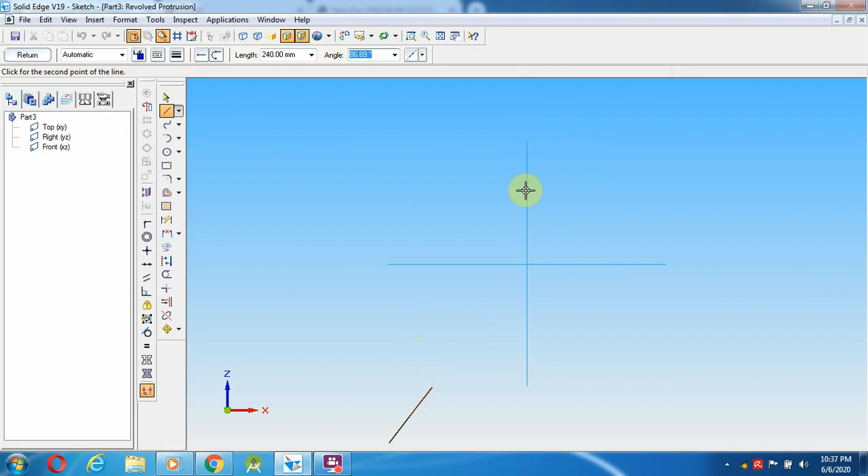Okay, go here, select a solid part, select revolved protrusion, select the front view, and select a line. So what is the height? 240 mm. I am going to draw a 240 mm line. 240, enter, and give fit.

Now after that, M12 mm dia. The hole is coming over here, a threaded hole. M means V shape threaded, having 12 mm diameter. So M12 means 6 mm, and up to this one will be 22 mm. So I am going to draw two lines: a 6 mm and a 5 mm line, because 12 means 6 at the top. So a 6 mm line.

M22 means 11 mm. We already drew up to 6 mm, so the remaining is 5 mm. After drawing the 5 mm, I am going to move downward. How much? 13 mm length. So I draw a 13 mm line downward, and then to the right side. How much does it have to go?

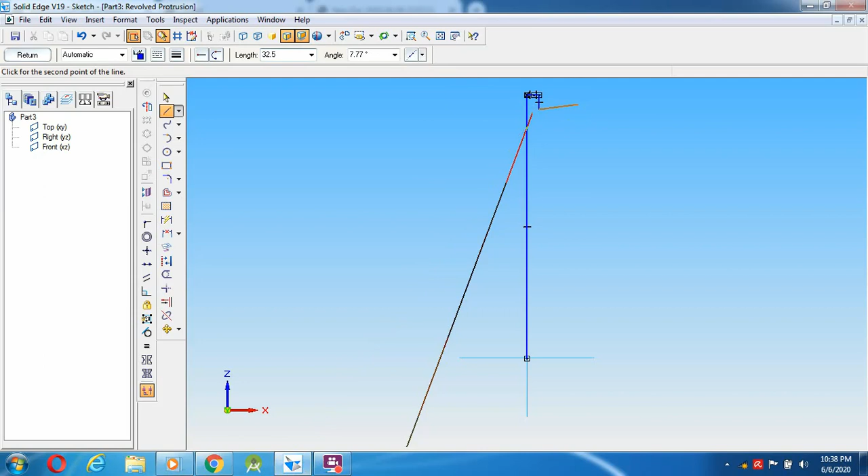The outer diameter is given as 65 mm. 65 mm means 32.5. We already drew up to 11 mm, so 32.5 minus 11 gives 21.5 mm. So I drew the 21.5 mm line.

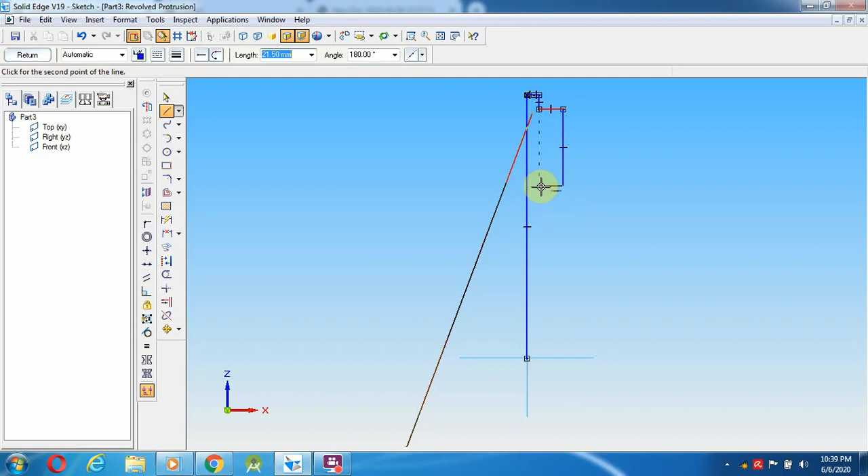Then I am going to make this length from here to this one. What is this length? They have not given it. From 83, up to here they have given a 13 mm distance. 83 minus 13 is 70 mm. So I draw a 70 mm line. Then I move toward the left side. What is this diameter? 19. This will be 32.5.

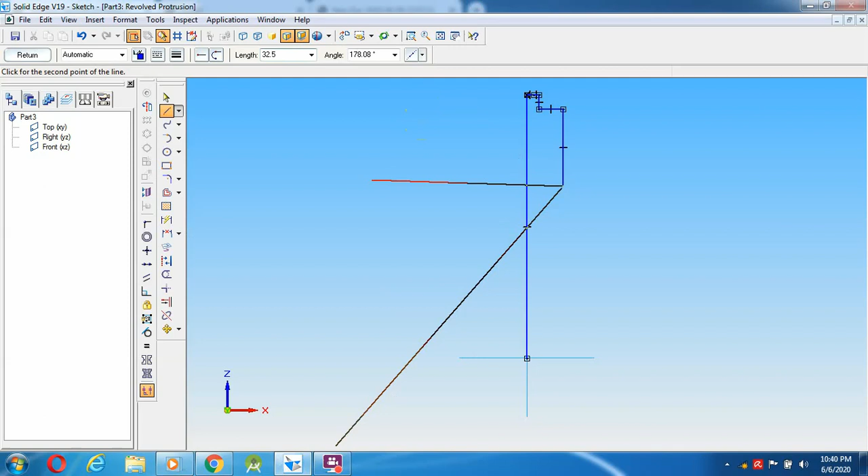So 32.5 minus 19 will be around 13.5 mm. 32.5 minus 19 mm, so 13.5 mm. Then left and right click. Then I am going to move this length down and join over here.

What is the length of this? That is 157 mm. We already calculated it: 240 minus 83 is 157 mm. So it has to be drawn up to 157 mm length.

Now I am going to draw this hole over here. What is its length? Up to 30 mm the threading is coming. The remaining 5 mm is a plain cylindrical hole. So that is 35 mm, and I am going to make the V shape here.

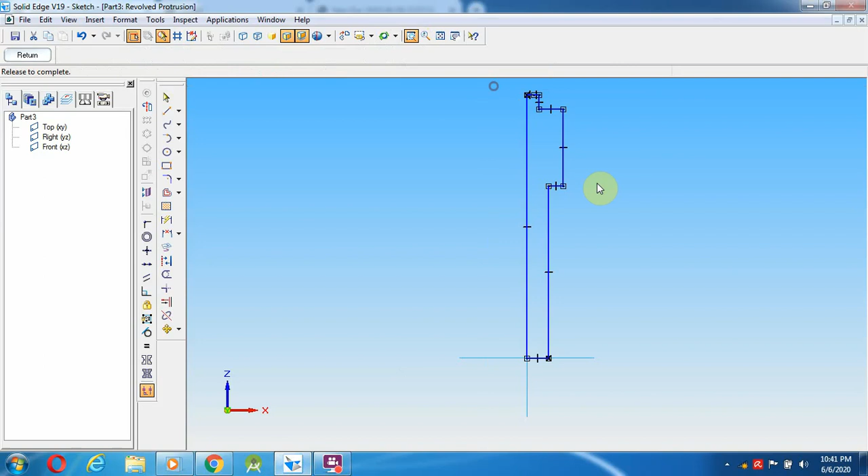Select the zoom option for this area. This is the line I drew for reference purposes; I am going to trim it. Select a line. From here downward I draw a 35 mm line, then toward this side. Toward the left it makes an angle of 180 plus 45, 225 degrees. So I provide a 225 degree angle.

Once it crosses, I stop. Then using the trim option, I trim this line and this line. After trimming, what other things do I want to do? This is the chamfer.

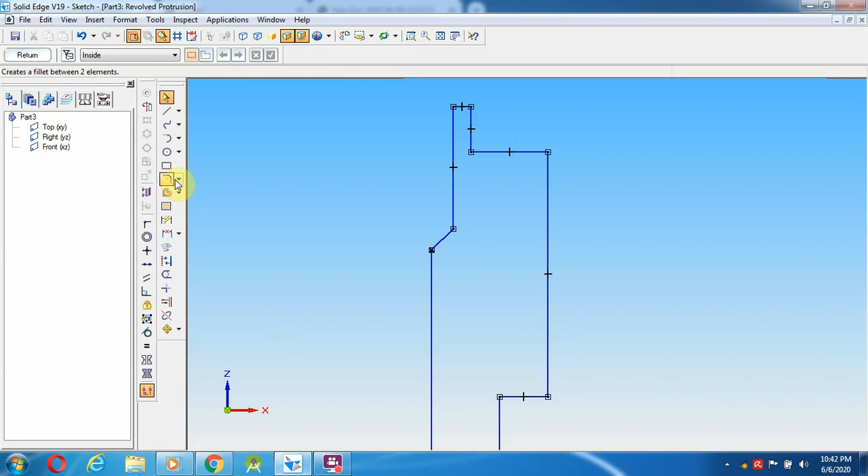Here I am going to make a chamfer. The chamfer value will be 10 into 45 degree. Select the fillet option nearby, the chamfer is there. Select the chamfer, then select the lines - this and this line. The angle we have to maintain is 45, and setback, that is 10 mm as given. Setback A is 10 mm, and this also 10 mm. So left and right click.

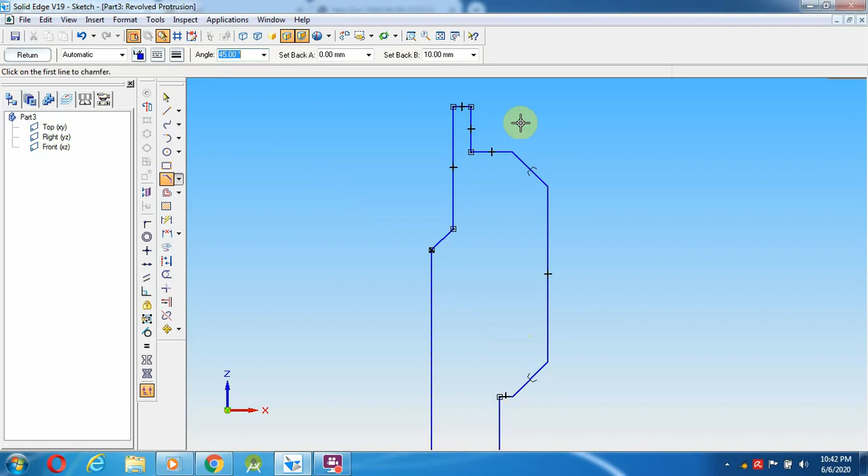Same like here, I am going to select left and right click and give fit. After giving the fit, go on and select the axis of revolution. Along with the line it has to rotate, so those lines I selected as axis of revolution. Give return, set angle and give fit - 360 degrees. If you have selected this, that screw spindle has to be created over here.

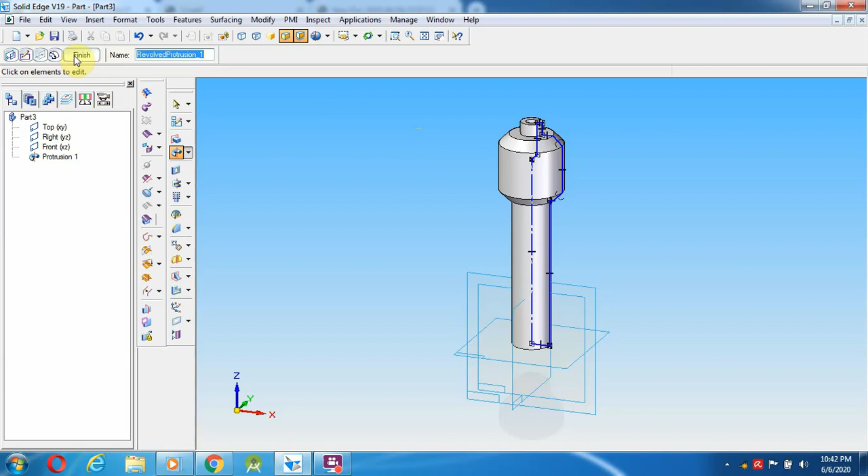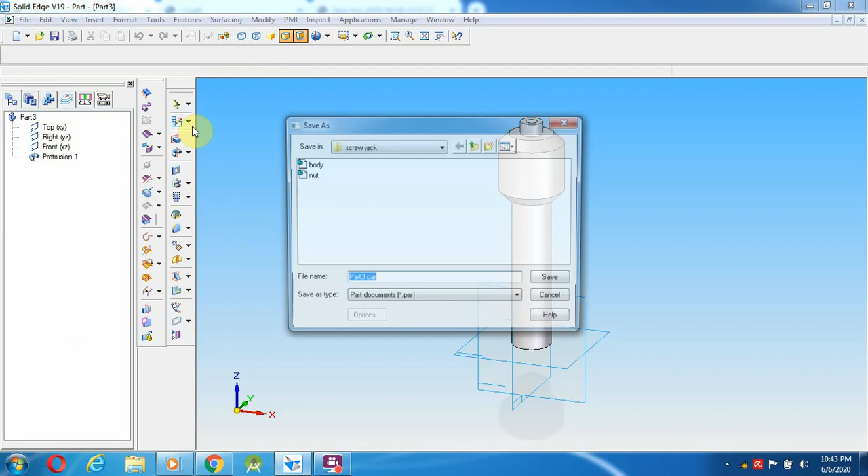What are all the other alterations we have to do in the screw spindle? In the middle I am going to make a hole. Before going to make a hole, I am going to save the drawing. So that is the screw spindle.

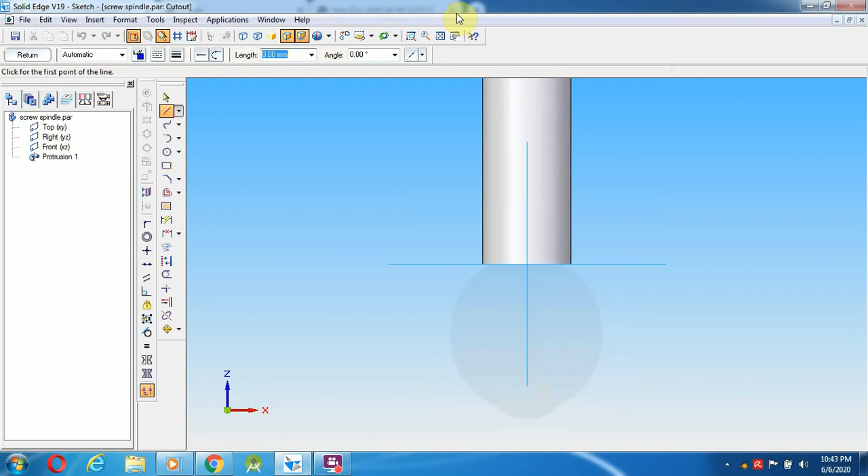After saving this, go here and select the cutout option. Now the cutout option - mid plane, either this or this one, because it is a circular one. Either plane you select, it will come over there. So this is the plane I am going to select. Give a fit. So from how much distance is the hole coming? From the bottom, as given, 35 mm height it is coming.

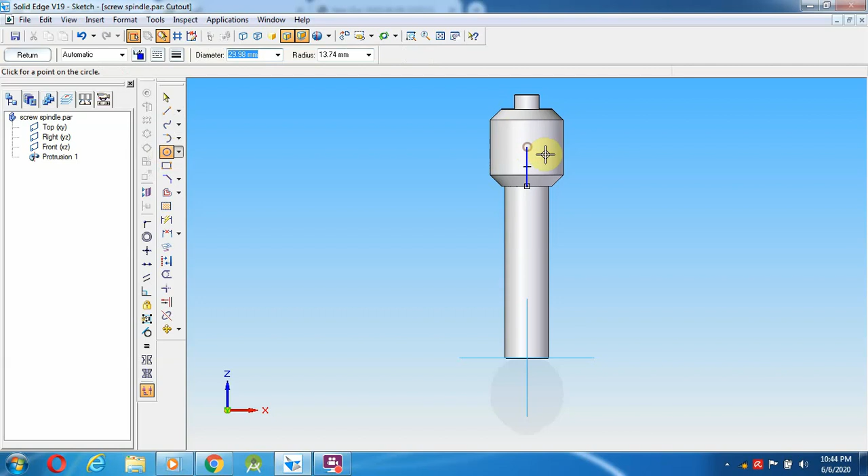So what is the diameter? 12 mm. So 12 mm diameter and 35 mm height. Select a line, from bottom here to 35 mm, and select a circle over here. What is the dia? Dia is 12 mm. After drawing the 12 mm dia, select a line and delete it.

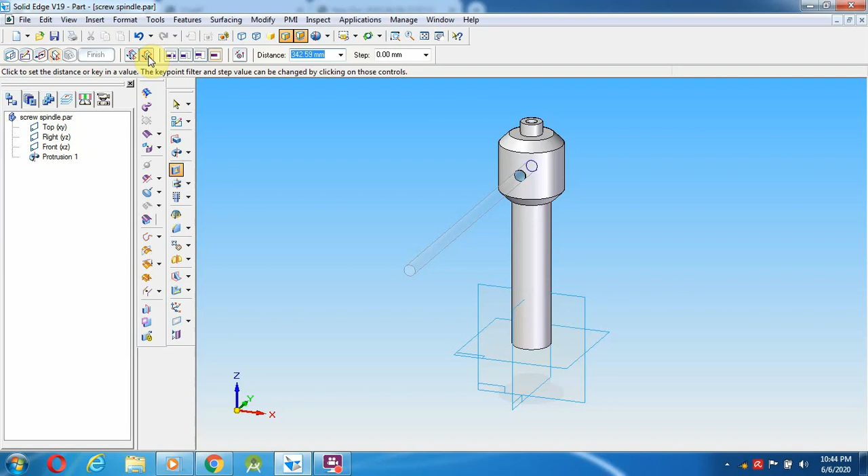Then give return. Use the cutout symmetric extent, because it will come from the plane on only one side, and I want to make the hole into both sides. So using the symmetric extent I am going to cut. It will be cut with left and right click. So this way we are going to make this cutout.

After doing this cutout, I am going to see if it comes out on the other side too. Yes, it comes. After that, going to make the threaded portion, it comes in the hole option. So the threaded is coming. Give straight one, yes, starting from here. What is the cylinder direction?

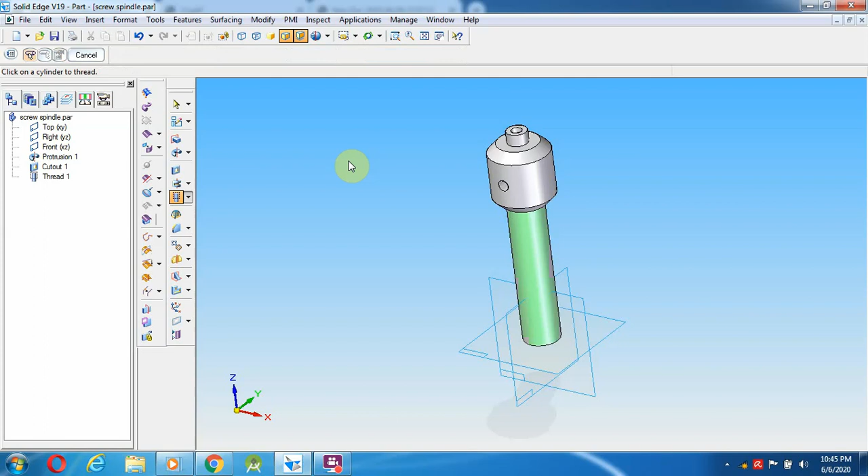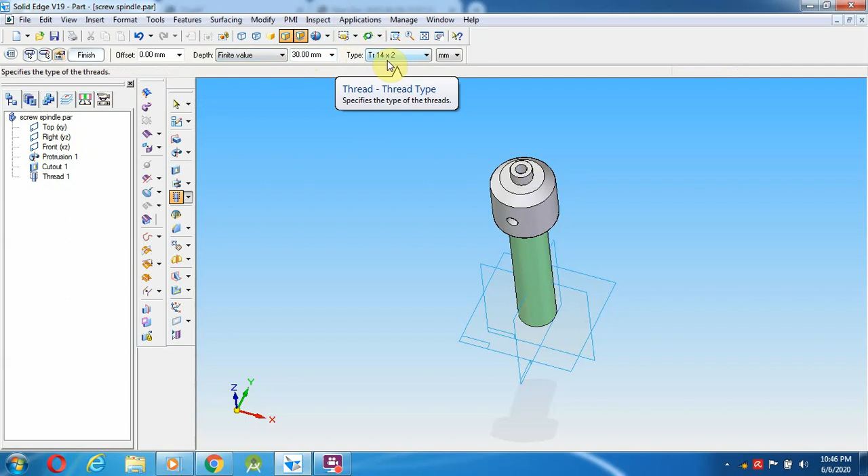It's not an issue, you can leave it. Then same like threaded, you can create the inner threaded portion. So in this particular cylindrical part, that threading is coming. Selected, starting from here. What is the distance here? It is finite value 30 mm, and here also it has to come as M12, but here it will be selected as 14. As it is, it's not an issue, you can select it, finish it up, cancel. Then you can give cancel. That's it, the screw spindle has been created over here.

Okay, then you can go to the next one. What is the next part? That is the fourth one, cup. So how to draw the cup? It is given as a fully sectional view. Only these portions have to be created over here. We will see in the video where the cup is.

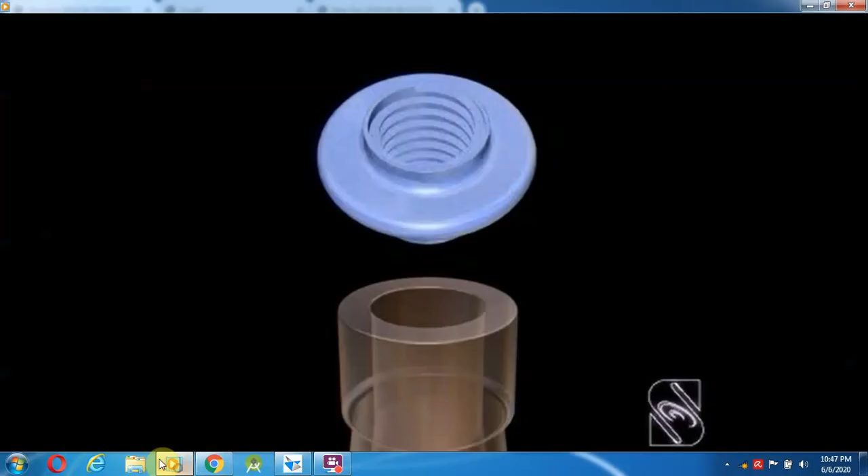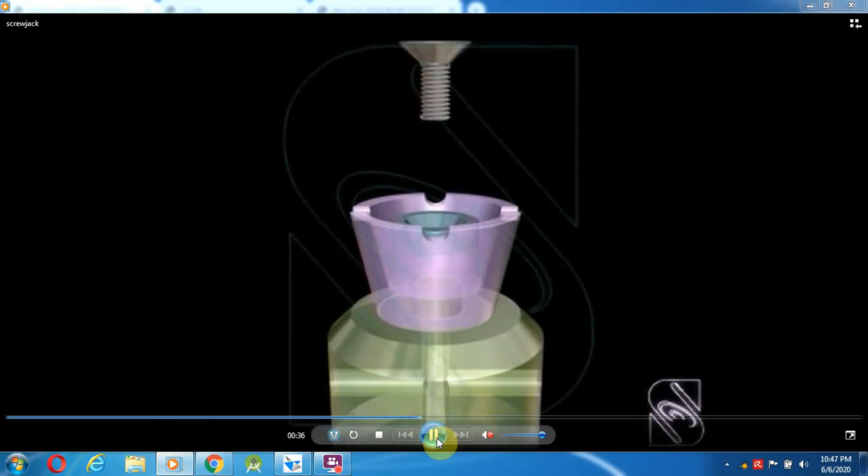So this is the cup, washer and a screw, CSK screw.

And the cup, if you see over here, it's like this. The top having the 4 semicircular holes over there, and also this area will be tapered in one.

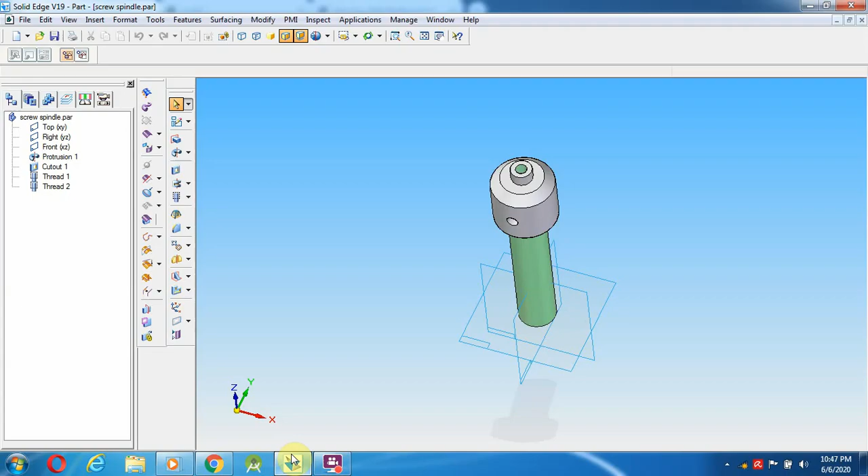So go here, I'm going to close, select a solid part. Again I'm going to give the revolved protrusion command, select a plane, front plane. So from this select a line. What is the diameter over here? That is the bottom one, 45 mm up to 22.5 mm. It is coming as a hole.

So I'm going to select and draw a 11.25 mm and 11.25 mm line. What is the 22.5 mm at the top? It is 11.25 mm, 11.25 mm, enter. And what is the other thing? So total length, for total dia 45 means at the top 22.5.

So all 22.5 means already we drawn from here to here 11.25. 22.5 minus 11.25, again it is 11.25 mm. So after drawing this, that angle we could not know.

So this inclined line angle, we are not knowing. So again I am going to draw the height, and we can move to this end, then we can create it. What is the full length, the length of this dia? They are not given over. See the top view, that is 65 mm.

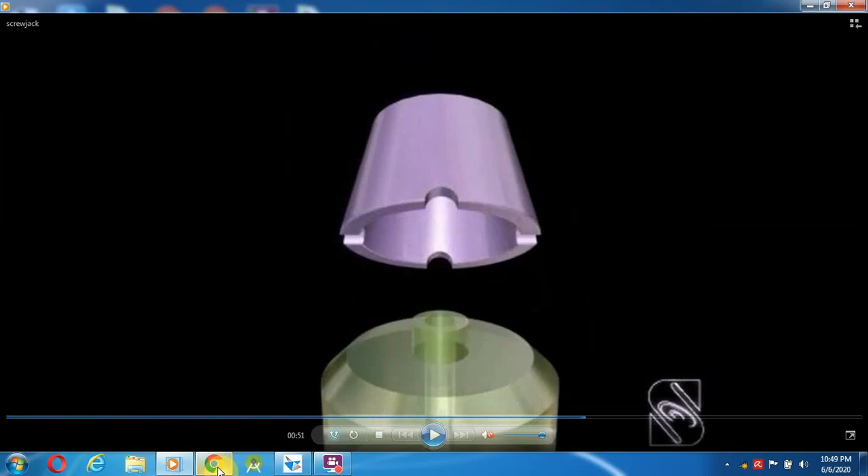So select a line from here to height. What is the height? 42 mm height, and towards this end is 65 means 32.5 mm. So 32.5, enter, and I am going to join over here.

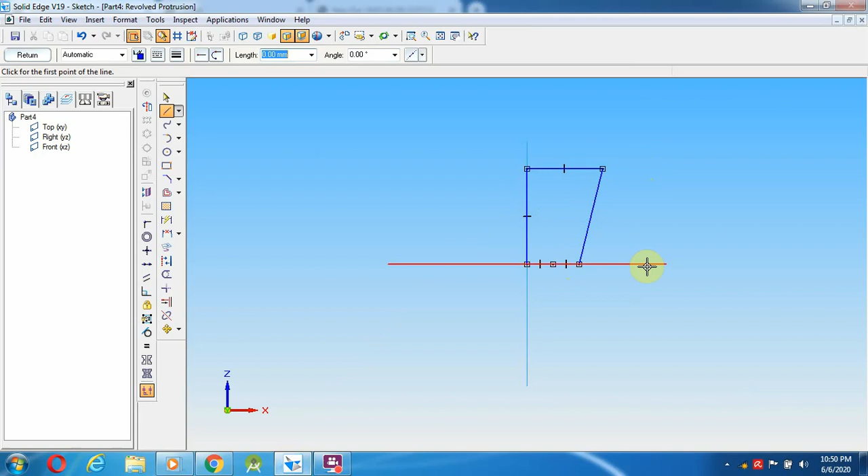After joining this, what is the next step? The next step is from here, what is the height? 12 mm. So I am going to draw one more line from here, 12, enter, to make one more line.

Then go to the offset option, make it here as a single, and I am going to select this line. Why? Because that line has to be moved over here a distance of 6 mm.

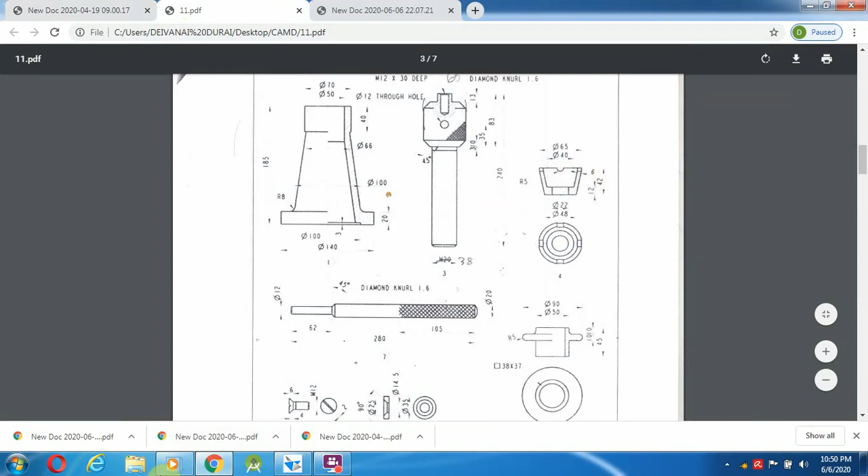Even if you are not seeing over here, you can see here the same screw jack drawing, so the dimension they given is 6 mm. So go over here, select the distance as 6 mm, enter, left and right click.

After that go to the trim option from the top. This is the line, even this also I am going to trim. Here also I am going to trim, so this line I am going to delete. Select a trim, so this is the line I am going to...

Control Z, because of that. So this you can leave it, and select a line from mid to 12 mm distance, make a straight line. And from this 11.25 line to one more line I am going to draw.

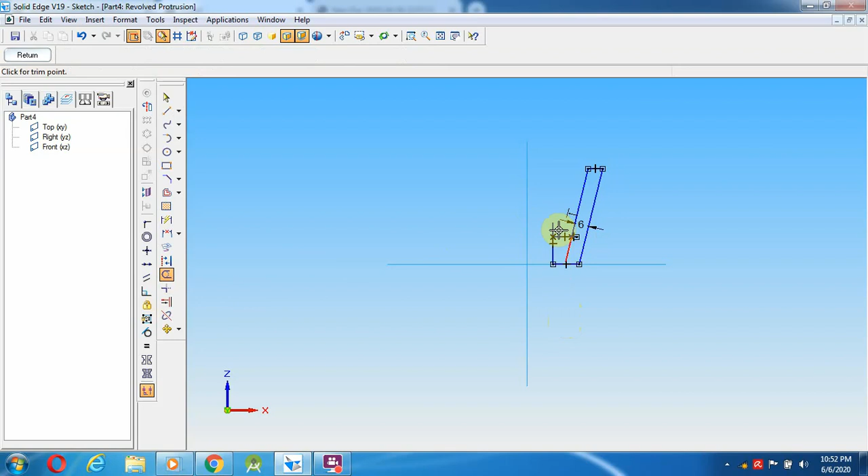Select a trim option over here, so those lines I am going to trim. Even here this line I am going to trim, because I actually require this particular surface. Once it has to be created, this line I am going to trim.

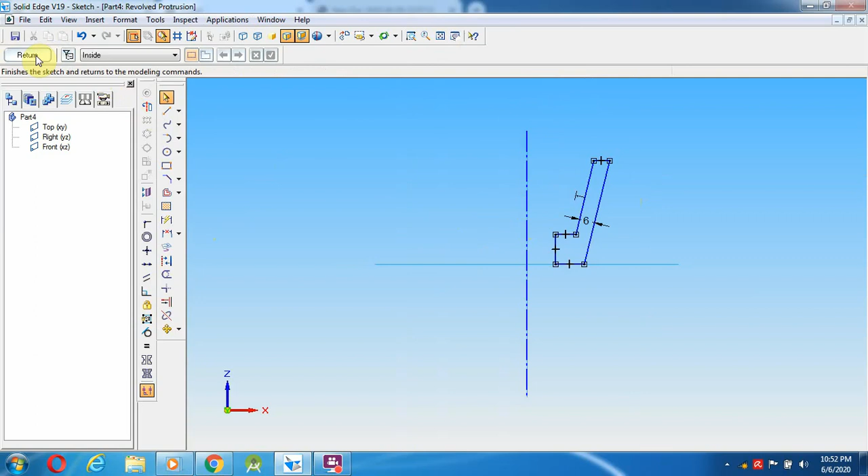So once this line has been trimmed, select the axis of revolution as this one, then give return and give 360 degrees. So the particular cup part, the initial position has to be drawn over here. This I am going to save as a cup.

So first initially these are all the things you have to make. After that the cutout. What is the cutout? So here already I shown semicircular cutout, so those things I have to do over here.

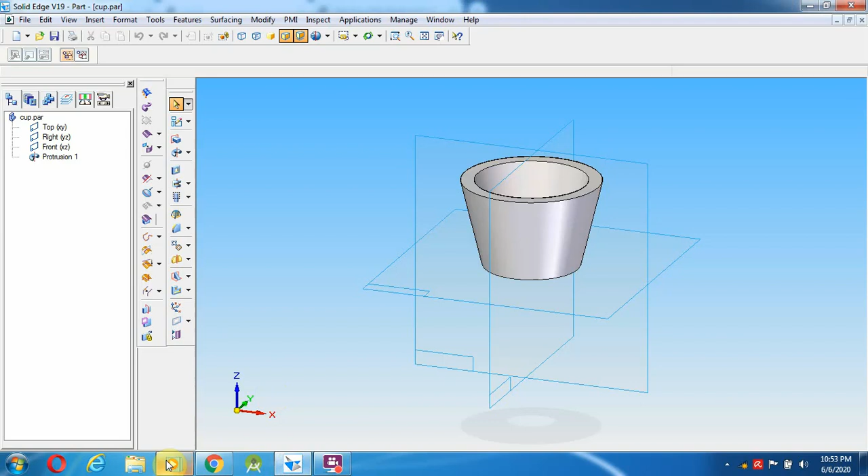So for this, what is the diameter? You can see over here. The diameter radius is given as 5. So select a cutout option. These two planes are passing over mid of the component.

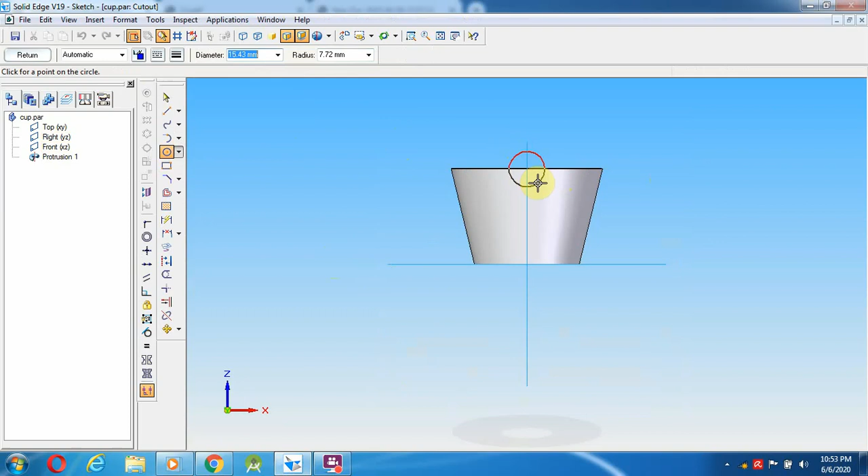So first one plane you can select a circle. From exactly over this is the center point. Radius is 5 mm, diameter is 10, and coming out, return. So using symmetric extent I am going to make those cutouts.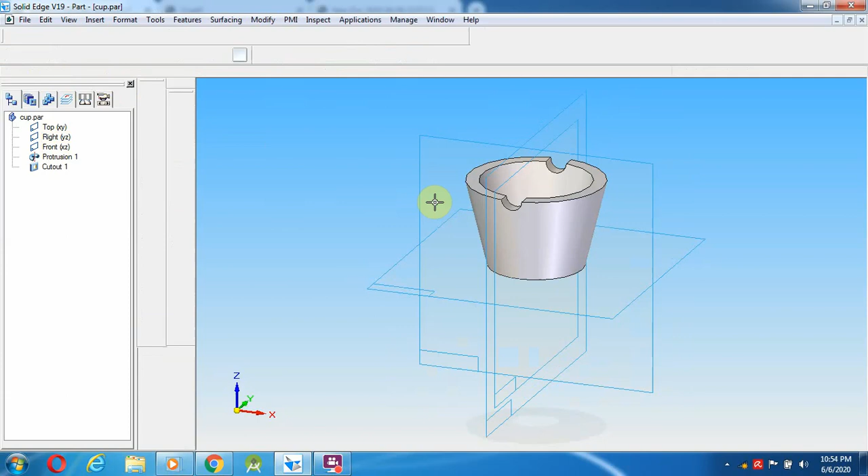Then again I am going to select cutout, this mid one, select a circle. From here I am going to make a 10 mm again. Then coming out, give return. So both sides symmetry extent, the cutout has to be created over here.

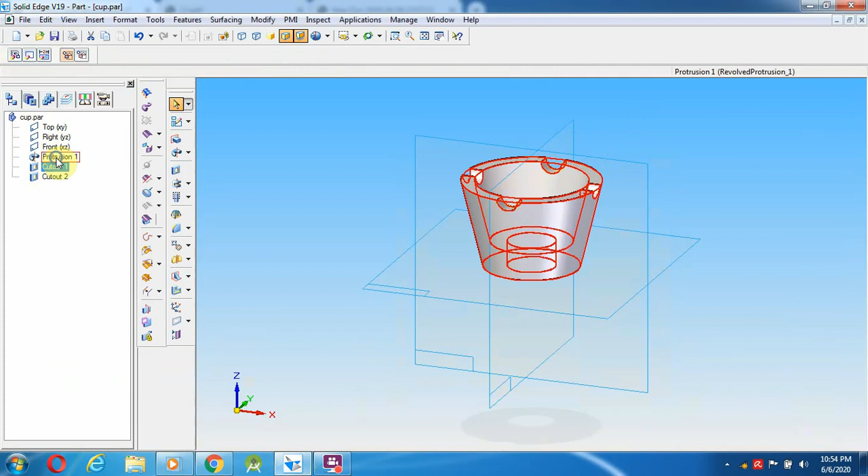So this has to be saved over here, this is called the cup. The cup has to be created like this. So here the initial profile for this one has to be created like this. So those profiles you have to create it over there. These points you should remember.

So then after saving this I'm going to close it. With that, this particular video is going to end. The remaining parts you will see in the next video.